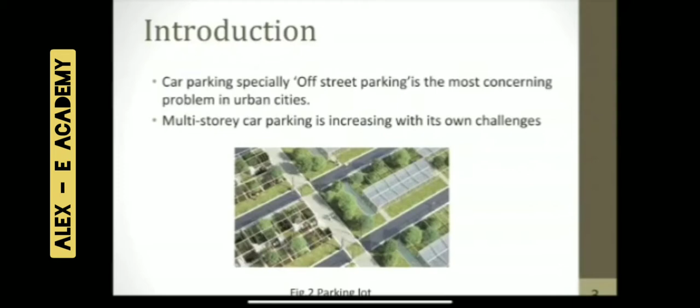The first one is introduction. The word parkade is a Canadian word that means a space for parking. The parkade is an efficient building that is dedicated to parking itself. In a country like India, one of the most concerning problems is off-street parking. For eradicating this problem, our multi-story helps in a lot of ways, and that is the main highlight of our introduction part.

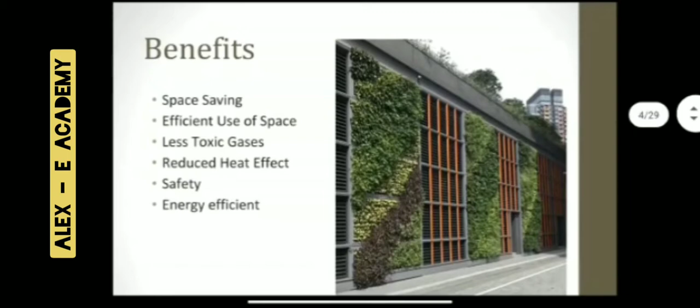The next slide is benefits. Our parking structure will be entirely different from other parking structures. The following are the benefits of our multi-story parking structures: space saving, efficient use of space, less toxic gases, reduced heat effect, safety, and energy efficient. Figure 3 is a model for our parkade structure.

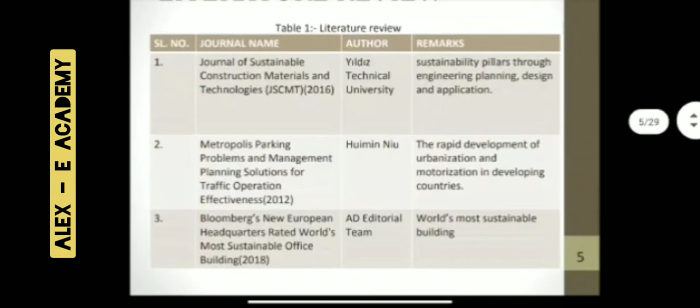The next two slides are the literature reviews we came across during the course of our project. The first one is Journal of Sustainable Construction Materials and Technologies, written by Yıldız Technical University, which highlighted the sustainability pillars through engineering planning, design and application. The next one is Metropolis Parking Problems and Management Planning Solution for Traffic Operations, written by Huimin Niu, which highlighted points such as the rapid development of urbanization and motorization in developing countries.

The third one is a case study regarding the world's most sustainable office building, authored by a team known as the AD Editorial Team. The fourth one is an IoT based intelligent parking management system using LED display, written by Swapna and her team, which highlighted that parking management using intelligence provides customers an easy way of parking vehicles which can be viewed through a display. Last but not least, demand and characteristics of parking system in urban areas, by Janak Parmar and team, which we came across noting that psychological and parking characteristics play important roles in parking choice.

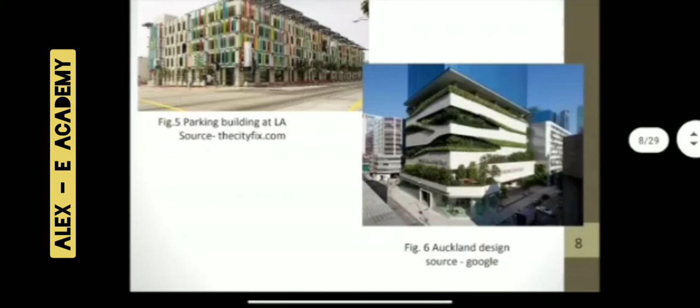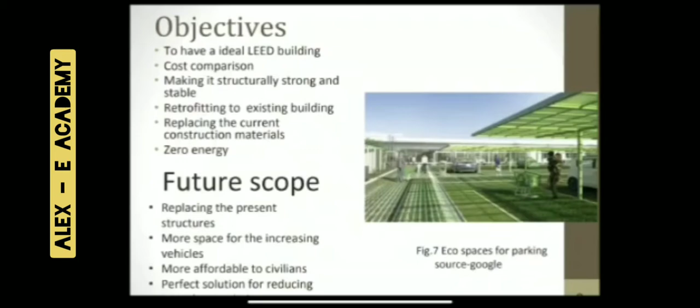The next slide is the key objectives for our structure, and they are: first, to have an ideal LEED building; cost comparison with other conventional structures; making it structurally strong and stable; retrofitting to existing buildings; and replacing the current construction materials with zero energy alternatives.

Talking about the future scope, there are more than 4, but we listed 4 of them: replacing the present structures, more space for the increasing vehicles, a solution for reducing carbon emission, and making it more affordable to civilians.

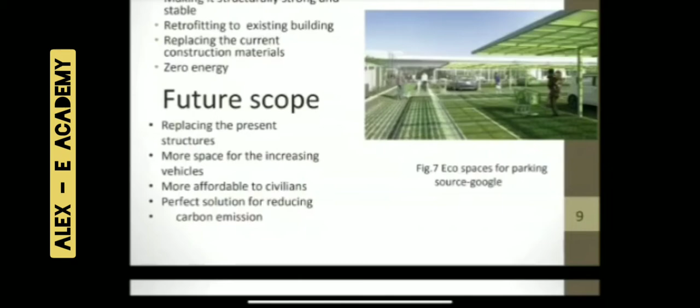As Raghuram said, our project consists of various phases, and I am here to talk about the construction materials. The first one is hempcrete, also known as hemp lime, as it consists of hemp herds along with lime and sand. It is used in exterior walls, and hempcrete's density is 15% that of traditional concrete. It is fireproof, a carbon sink, pest resistant, and a strong insulator which stores and releases moisture.

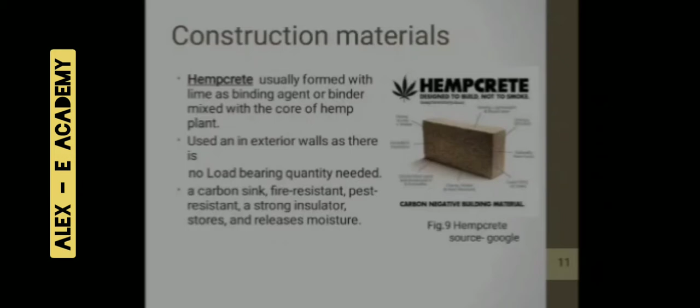The next one is Ferrock. It is a carbon negative, environmentally friendly compound, made up of 95% recycled materials such as waste steel dust and silica from ground up glass, which when poured and upon reaction with carbon dioxide creates iron carbonates. It reduces pollution because these iron carbonates entrap CO2 from the atmosphere into the rock.

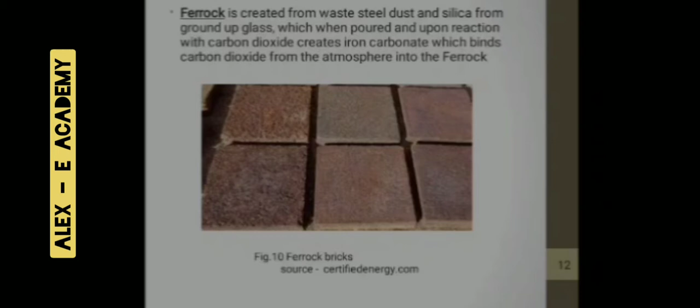The next one is ultra high performance concrete. It is a cementitious concrete material. The minimum specified compressive strength is 17,000 pounds per square inch. It has specified durability, tensile ductility, and toughness requirements. Hence, we can say that it is a sustainable material.

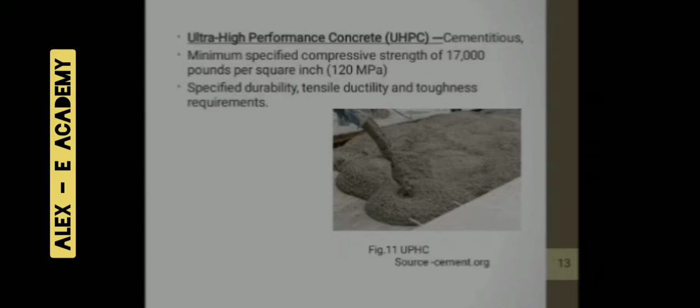Recycled asphalt concrete is manufactured by mixing asphalt and aggregates along with soy-based striping paints. Asphalt is an environmentally friendly, sustainable pavement material. The low consumption of energy for production and construction, and low emission of greenhouse gases, makes it a sustainable material.

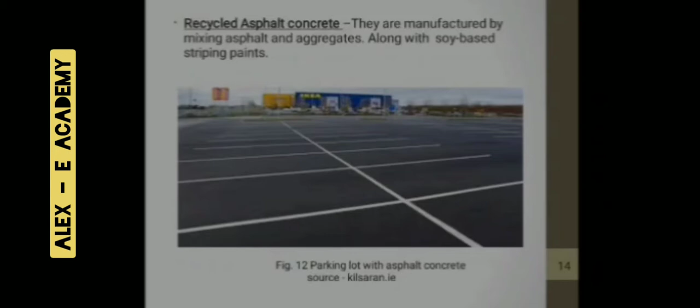The next one is sandwich walls. These are insulated solid facade elements that provide insulating properties as they are made up of two reinforced concrete shells, mostly made up of polystyrene, rock wool, or other approved materials.

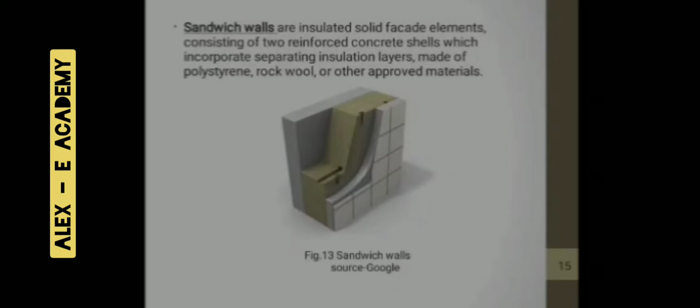In the next few slides, we are going to discuss various technological improvements we have implemented in our buildings. The first one is integrated ceiling panels.

These innovative aluminum petals not only provide lighting, they also provide heating, cooling, and other acoustic functions. From figure 14, we can see the petal leaf design of the panel. In the system, there are about 500,000 LED lights which use 40% less energy compared to traditional lighting systems. Figure 15 shows integrated ceiling panels inside a building.

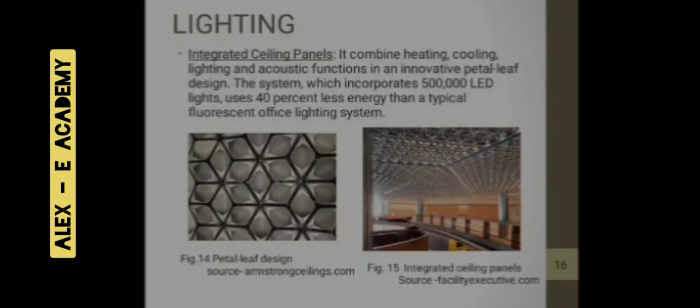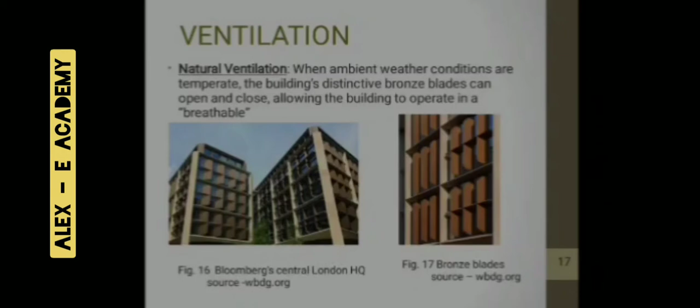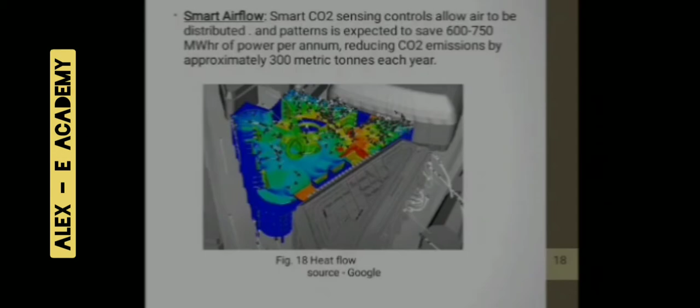The next one is smart airflow. We include this type of airflow where natural ventilation is not possible. This system reduces CO2 emissions by approximately 300 metric tons each year. The smart CO2 sensing controls save about 600 to 750 megawatt hours of power per annum.

The next one is combined heat and power, which supplies heat and power in a single efficient system with reduced carbon emissions. The waste heat generated from this process is recycled for cooling and heating, and in use it is expected to save 500 to 750 metric tons of CO2 each year.

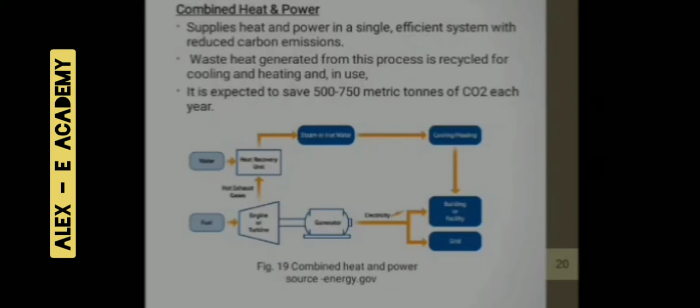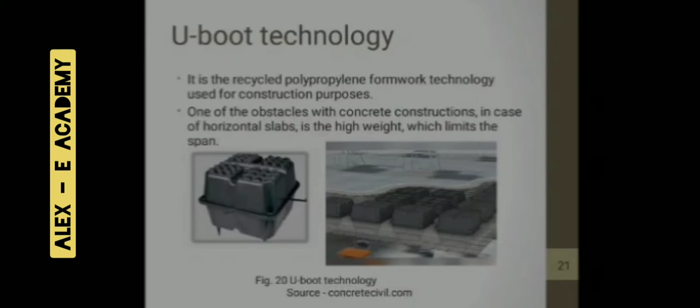The next one is U-boot technology. It is a recycled polypropylene formwork technology used for construction purposes. One of the obstacles with concrete constructions in the case of horizontal slabs is the high weight, which limits the span. We can see U-boot technology in figure 20.

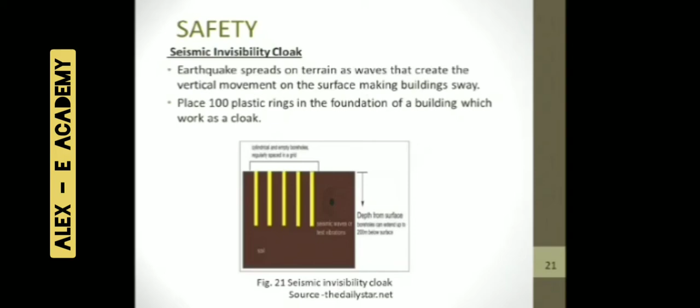Now talking about waterlogging and flood. Sump pumps will have the major role in reducing the level of water if it's excessive in our building, sucking out the excess water through special pipes out of the building. Another one is French drains, a traditional method which deals with lower levels of waterlogging problems.

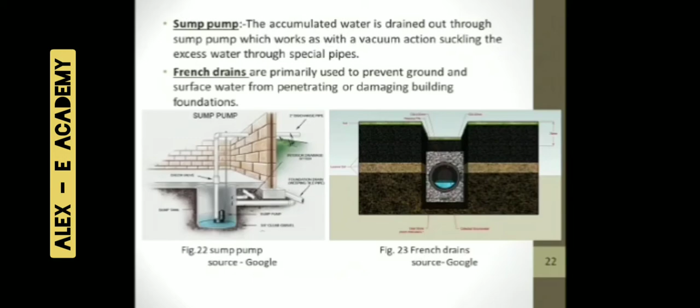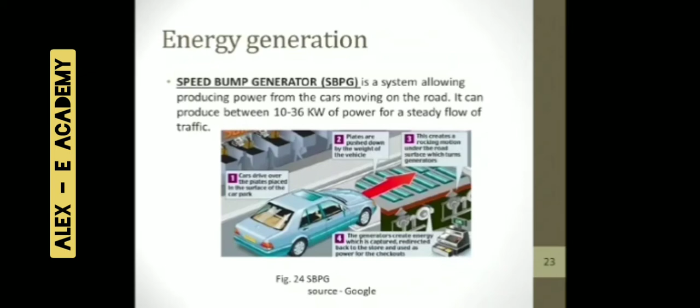Now talking about energy generation, as we have a zero energy building, we will have speed bump generators. As we are dealing with numerous vehicles, we can use these vehicles to produce 10 to 36 kilowatts of power in a steady flow of traffic.

Another one is solar panels. We are very much familiar with this term. We are placing it on the terrace, which will be facing the sun.

Another one is the automatic parking system, which will be in the ground floor and the basements. There will be minimal human interference, and it will be fully controlled by the IoT system.

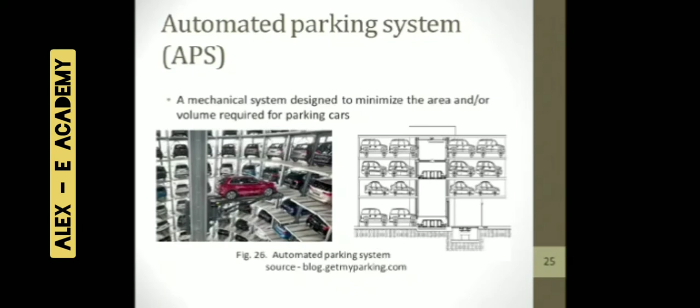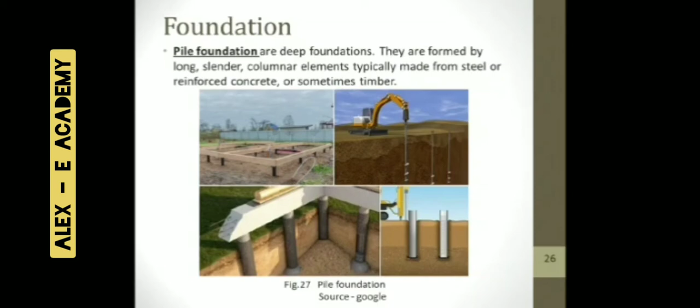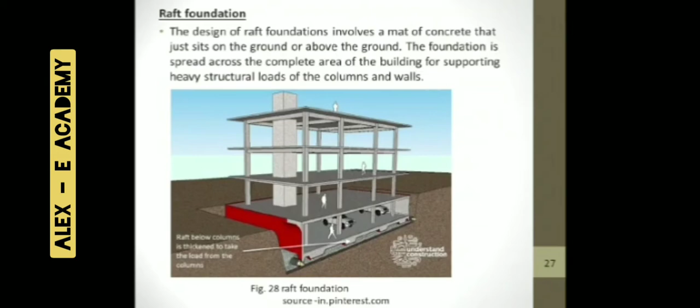Talking about the foundation, we will have pile foundation if our structure contains 3 or more levels. According to the availability of construction materials, we can have it in steel, reinforced concrete, or sometimes timber. If our structure has 2 or fewer levels, we can even have a raft foundation, which deals with lower levels of load carrying systems. In figure 28, you can see the typical raft columns, which are actually a mat of concrete.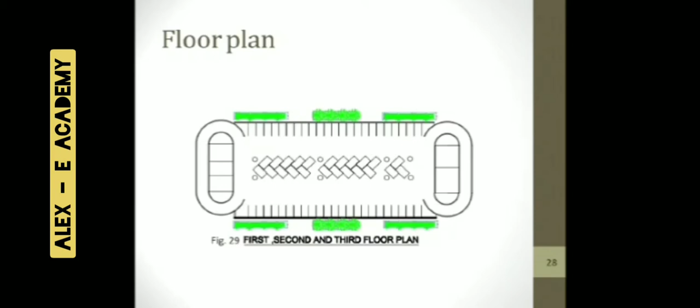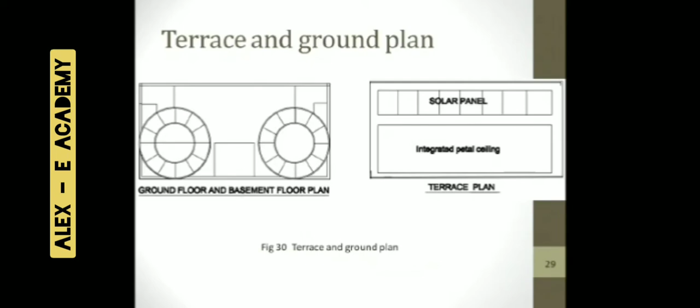The ground floor and basement floor, where we have planned to have the automatic parking system, IoT controlled. On the right side, you can see the terrace plan, where we are arranging the solar panels with integrated petal ceilings.

In figure 31, you can see the front elevation of the building.

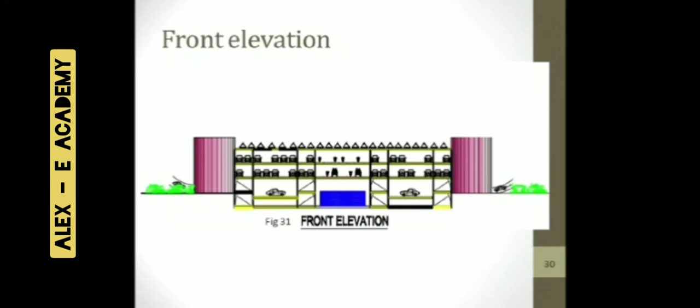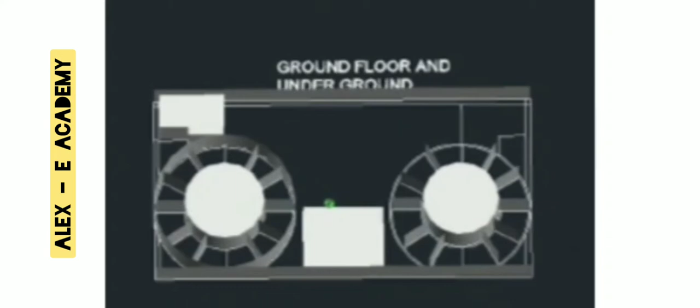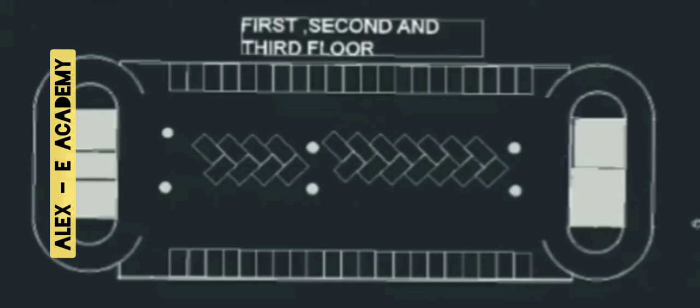In this video, you can see the 3D CAD format of our building, ground floor and basement, with first, second and third floor elevations. You can see the arrangements of the slots in the basement in the circular disc form. Further, in the first, second and third floor plans, you can see the column arrangements and the slots.

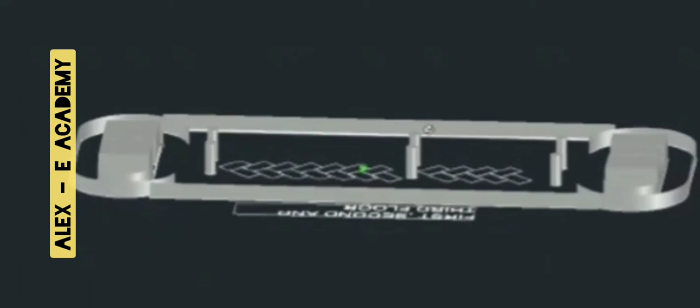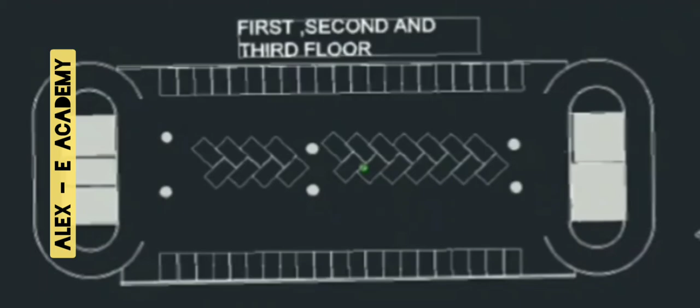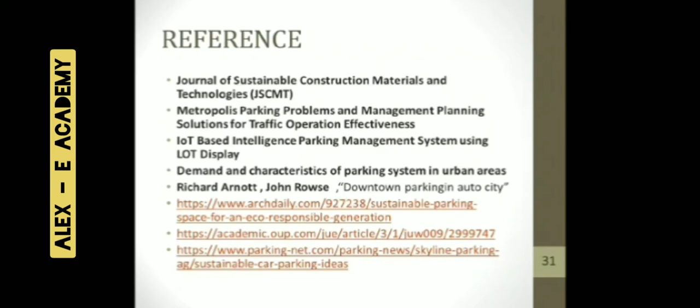This leads us to the end of our presentation. We hope you have got the idea of what kind of sustainable project we are discussing here. It will be a platinum grade according to LEED certifications.